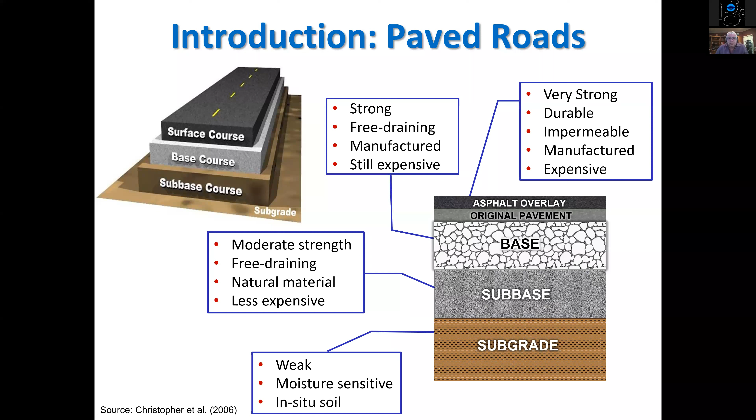All right, so how are geosynthetics going to help in these roadway applications? And on that, I have some great news for you, very, very good news. There is a huge number of geosynthetics with a wide range of properties that can be used in numerous roadway applications. This is to fulfill many different functions through a wide range, a wide variety of mechanisms.

This is great. We have the opportunity to improve performance. We have the opportunity to reduce costs. This is a very competitive market which fosters innovation. This is wonderful, and there are opportunities to optimize solutions, not only to address cost and performance, but also aspects such as sustainability that are becoming increasingly relevant for designers.

Yes, this is also a good news, a blessing and a curse. The not-so-good aspect is that we really need to recognize the differences, and this may be a daunting mission. We have many geosynthetics, many properties, many applications, many functions and many mechanisms, and this may lead to confusion.

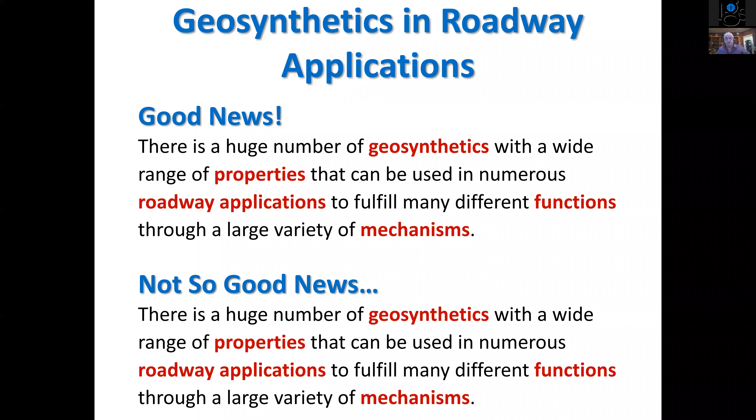In some cases I'm going to get into some advances. Ultimately what we want are the properties, and I'm going to get into some advances in the properties for use of geosynthetics in roadway applications.

Very briefly, just to relate to you what are the main geosynthetics we're going to be talking about in these applications. This includes geotextiles and many types of geotextiles, geogrids and geocells. I'm strictly going to focus on geosynthetics used within the body, within the structural component of the roadway. So I'm going to leave aside things like geosynthetics that can do a great job in erosion control, in surface water management. I'm not going to get into those.

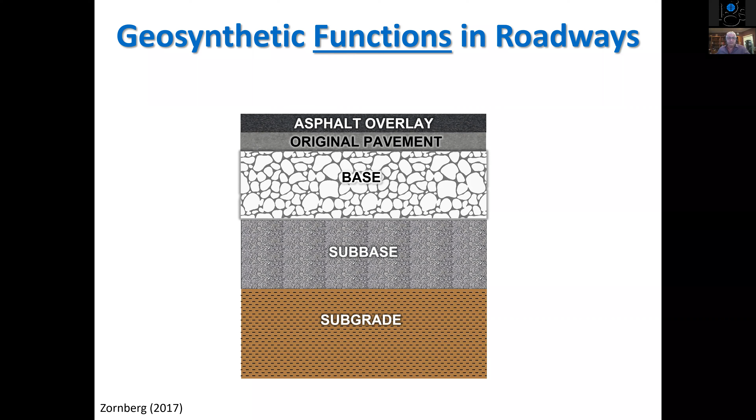So this is again the cross-section of our roadway. Where is geosynthetics going to help us, what functions? I'm just going to list them to you, not define them. So the different functions, and we're going to come back to these, some of them are mechanical: separation. We just want to keep dissimilar materials separate. And reinforcement, this is also a mechanical function.

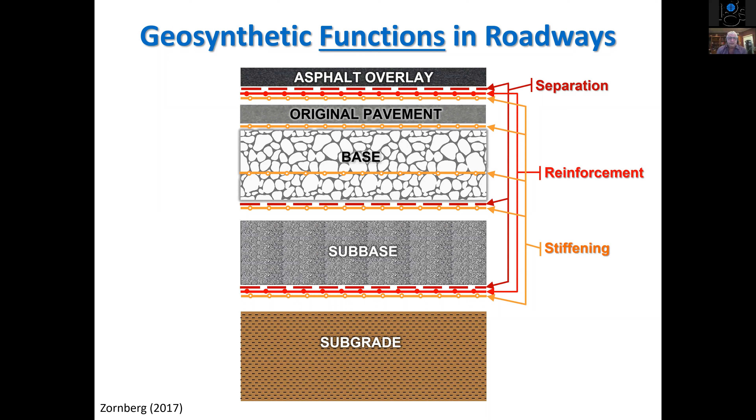Essentially we're dealing with comparatively large strains. We're developing tension in cases where we want to avoid some form of failure, of collapse. Then I'm going to call this stiffening. That is also a mechanical improvement, but here we're going to develop tension, though the focus, the objective, is going to be the control of deformations.

Then we have hydraulic functions, and this includes filtration. We want the water to get through, but the fines not to get through. We may have, as a strategy, barrier -- I'm going to touch on that in at least some cases -- when we want water to stay out, we want containment. And finally, we may have as a strategy the internal drainage within the roadway.

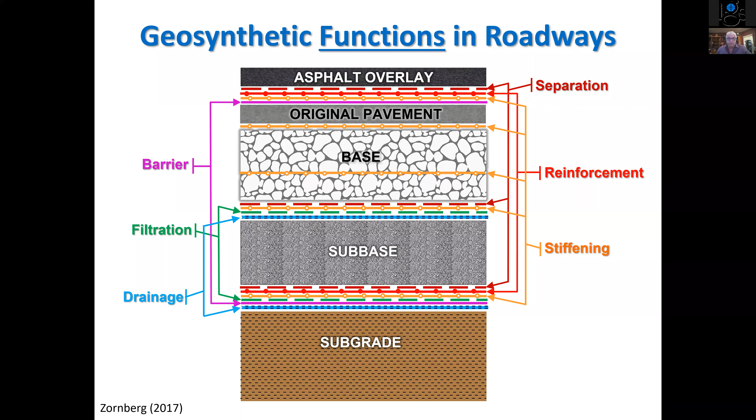All right, so we have talked about the different functions: separation, reinforcement, stiffening, filtration, barrier, drainage, protection -- protection I've just added here. How are we going to relate this to the applications? That's going to be the focus of this presentation.

I'm going to focus on 6 of these applications. The reason and the way we're going to come to each one is because the owner, the Department of Transportation, the private developer, has some design objectives -- I want to mitigate reflective cracks in my future overlay, for example. And the functions, we know why we want the functions: because they are the gateway to get the right specifications for the right properties.

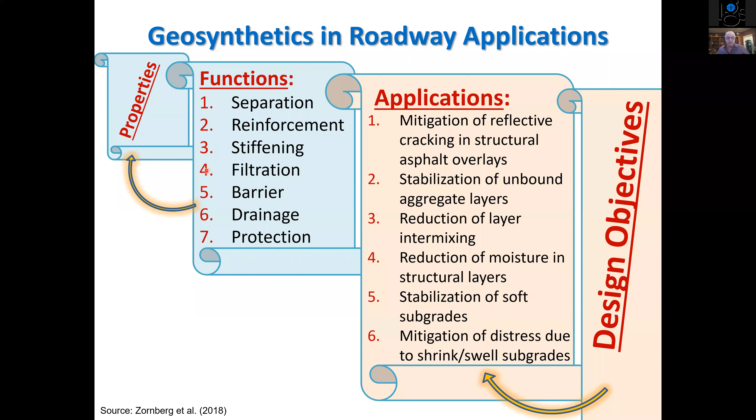But ultimately we want to go -- and I'm going to put my pointer here -- we want to go from the design objectives all the way to the properties, and there is a missing link. That missing link is the mechanisms, and we need that mechanism to link the application we're dealing with to the function we need to satisfy for that application.

So again, the focus is going to be on applications, and I'm going to walk you through 6 applications. Here I have them ordered 1 through 6, essentially from top to bottom. One, we're going to start with the mitigation of reflective cracking in structural asphalt overlays. Then we're going to get to the unbound aggregates, the base, the subbase, and we're going to talk about stabilization of unbound aggregate layers.

Then we're going to get to the interface with the subgrade, and we're going to talk about reduction of layer mixing, intermixing, and reduction of moisture into the structural layers. Then we're going to get to the subgrade, and specifically talk about stabilization of soft subgrades and mitigation of problems associated with the presence of shrink-swell subgrades, expansive clays, or frost-susceptible soils.

We could have organized this in a different way. For example, we could say that in some cases we're going to talk about mitigation of detrimental effects triggered not by traffic loads, but things that we have not designed, like reflective cracking in structural overlays or volumetric changes in the subgrade.

We could talk about stabilization of the base or the subgrade, where essentially we want to either enhance or prevent the degradation of the important properties that allow good performance against traffic loads, or we need to avoid or reduce problems that are time dependent, like layer intermixing and the presence of moisture.

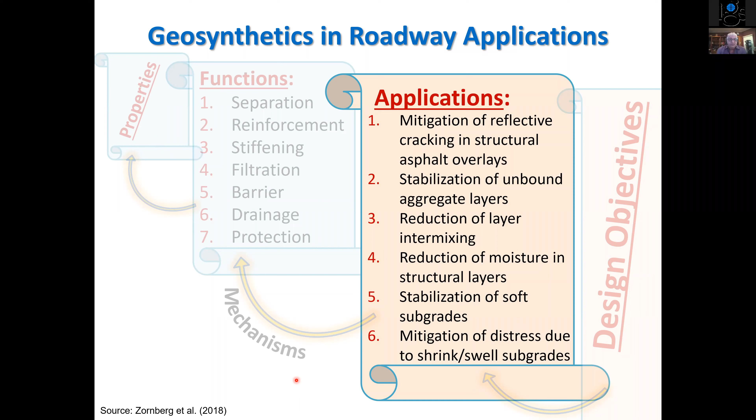To facilitate this, my good colleague and friend, Erol Tutumluer, and I have developed this table. Essentially what we're going to do in this presentation is I'm going to walk you through this table, and if you want, you can go ahead and download it.

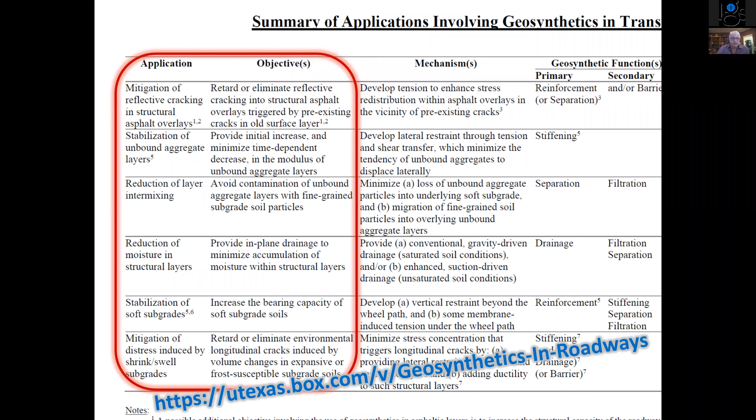So let's do it. We have 6 applications to cover. In case you want it, here I'm going to give you once again the URL, in case you want to download this table and sing along.

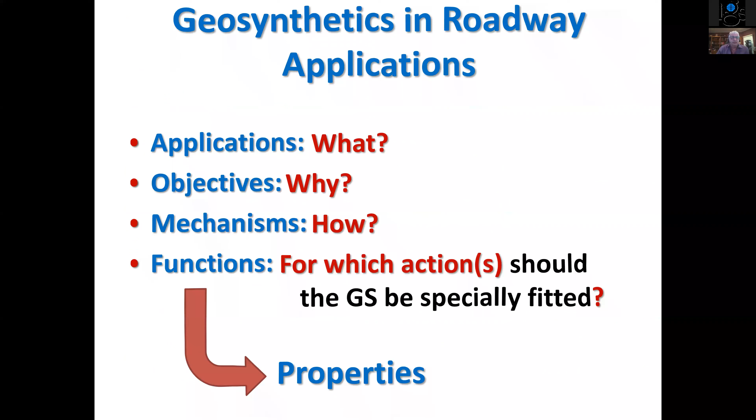Let's go to the first application. This is a very important one: mitigation of asphalt reflective cracking.

Essentially, the objective is to retard or eliminate reflective cracking into structural asphalt overlays that are triggered by the presence of existing cracks in the old surface. So here we have, for example, a paved surface in need of retrofitting. A typical large maintenance operation would be to place an asphaltic layer, perhaps 2, 3, 4 inches thick.

The problem is that we may have flexural and shear modes that very quickly may lead to the reflection of the pre-existing cracks into the brand new asphalt overlay.

Let me tell you upfront, this is a reasonably complex application, and indeed we have two quite different strategies to address this problem using geosynthetics. One, I'm going to identify as tension development. We're going to enhance the stress distribution within the asphalt overlay in the vicinity of the pre-existing cracks. If we're able to decrease the magnitude of the stress concentration, we're not going to trigger the crack, and that's the strategy in this particular application.

There's a different one: stress relief. In stress relief, we're going to allow crack propagation, but we're going to force, or educate, the crack to propagate in the right direction. Specifically, we're going to force the crack to develop along the interface between the new overlay and the pre-existing asphalt layer.

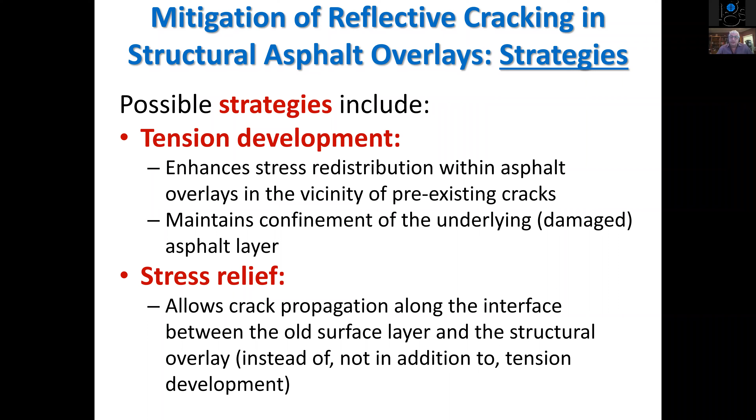The idea in this case is that the geosynthetic will allow the development of tension that will not necessarily avoid the crack from moving, but will distribute the strains in a way that we do not reach the threshold that leads to the triggering of the crack.

Rather than having reflection of the crack without the geosynthetic, once we have the geosynthetic acting as stress relief, essentially what we're forcing is a differential of lateral displacements within the pre-existing asphaltic layer and the new overlay. A crack will develop, but it will develop along the interface between the new overlay and the pre-existing asphaltic layer.

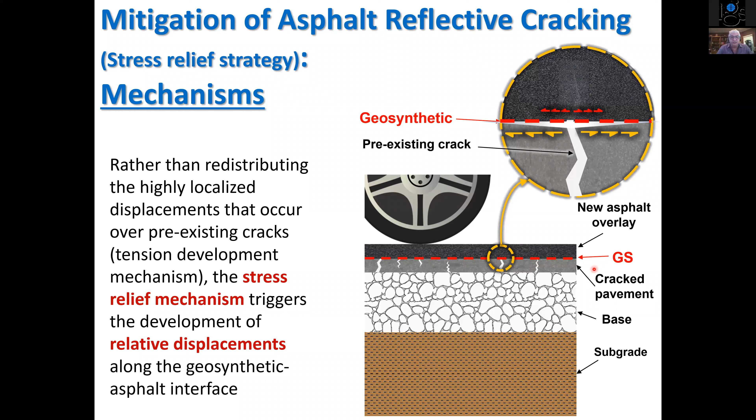So what are the geosynthetic functions? We have identified the mechanisms, and that is my main goal in this webinar. Once we have identified the mechanisms, what are the functions? If I want tension development, I need reinforcement - a geosynthetic that will develop tensile strength and stiffness. If I'm going for stress relief, some could call it a different function, but I'll call it a sub-function within the separation family.

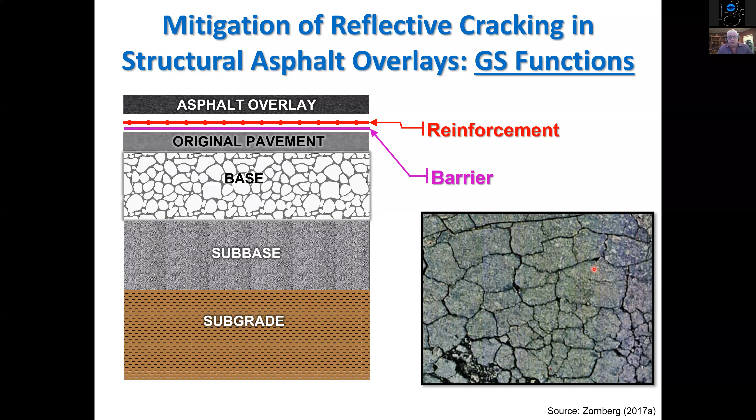Independent of which one it is, we may have a third objective that will improve the performance of the road: having a barrier to moisture infiltration. In case the cracks develop, the barrier will mitigate the continued infiltration into the additional layers. We can even have combinations, for example reinforcement and barrier, or stress relief and barrier.

I'm not going to dive into the details of the properties, but as you can imagine, once we have the functions, we can have a good sense of what the properties are going to be: tensile strength, unconfined tensile stiffness, asphalt retention, survivability related properties. That's a common one that we're going to see over and over.

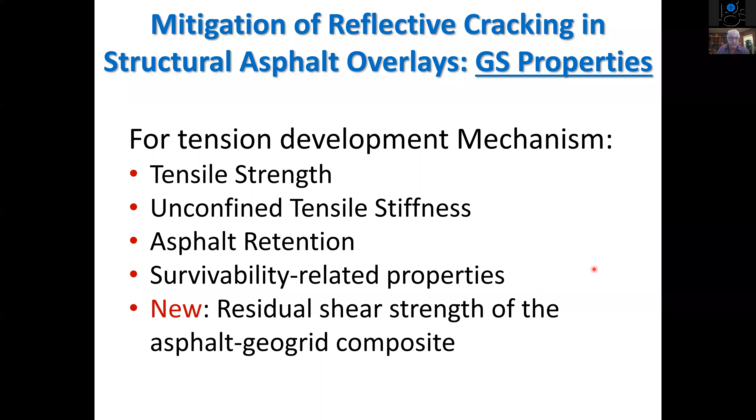I'm going to touch very briefly on something new. From time to time, in several of these applications, I'll cover at least one aspect that I consider a new direction or new property being considered in the industry. This is the post-peak, residual shear strength of the asphalt geogrid composite.

The benefit of this application is that we maintain the integrity of the structural asphalt overlay. If we maintain the integrity, we ultimately avoid the water intrusion that accelerates degradation of the asphaltic layer. There are many different types of geosynthetics used in these interlayers, known by different names: geotextiles, glass geogrids, polymeric geogrids, geocomposites, hybrid geomats, and peel and stick interlayers.

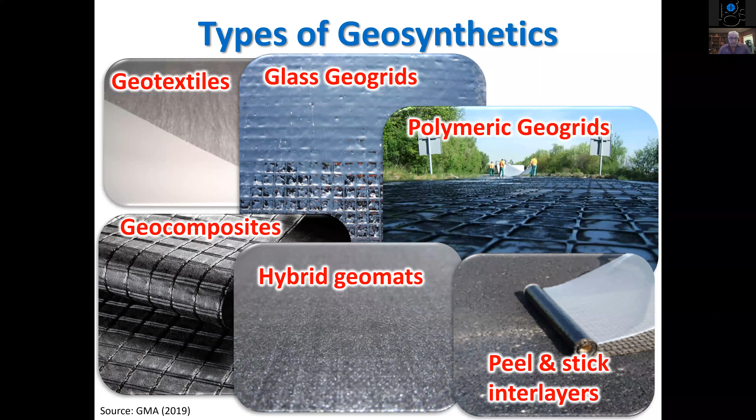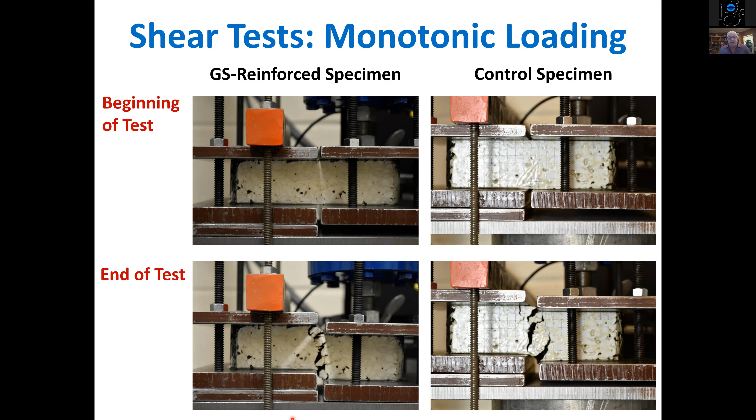In the case where we're interested in tension development, as illustration of how geosynthetics may work, this is monotonic loading, which is not the real loading, but you can see a significant difference in the load needed and in the mode of failure. This is a geosynthetic reinforced specimen, and this is a control specimen. What's interesting is that the control specimen, once it fails, it fails - there is no residual contribution.

But in the geosynthetic reinforced specimens, once we've reached the peak strength, the geosynthetic continues to help. So the energy continues to develop even after having reached peak - this is for polymeric geogrids. So there is a post-peak, post-failure, continued benefit of having the geosynthetic.

This is on cyclic loading. I'm not going to get into the details, but similarly, the results in specimens conducted under cyclic loading in shear are also consistent with the monotonic ones - different results, but similar, consistent trends. Here, for example, in the control specimen there's a very clear, well-defined failure. Here it is failure too, but over a much more distributed area.

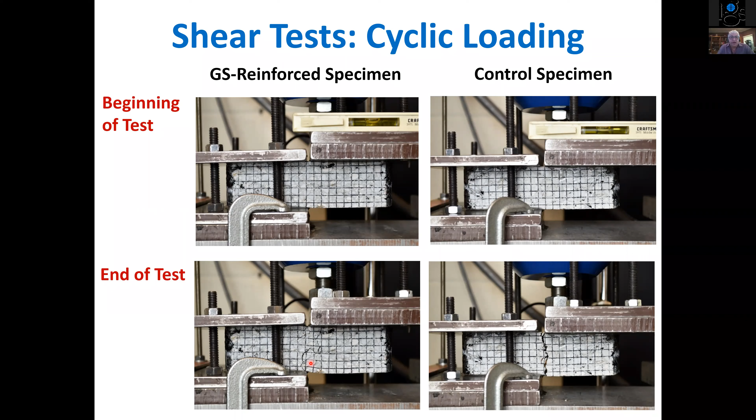I'm showing you the results of cyclic loading under different amplitudes - the green is the geosynthetic reinforcement load versus number of cycles, and the black is the control. This is just to show that the improvement the geosynthetic can provide in the asphaltic layer is significant. It can lead to a significant increase in the design life of the structural overlay.

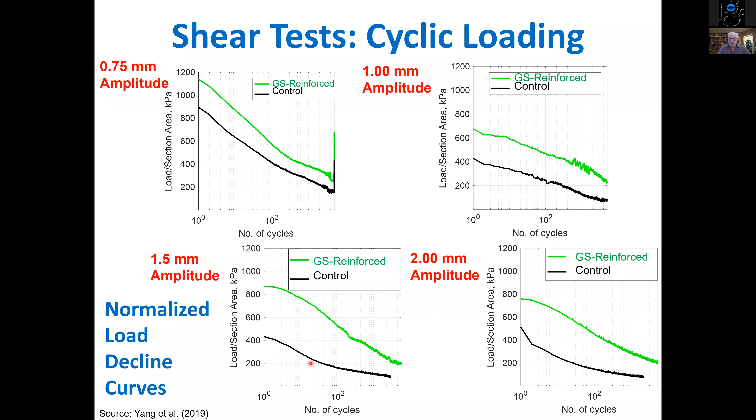Let's go to a next application. So we started from the top asphaltic layers. Let's go to stabilization of unbound aggregate layers.

The objective in this case has to do with stiffening the base or subbase, the unbound aggregate. This is done by providing an initial increase in modulus. The roads, after compaction, the base is born very stiff and very good. The problem is what happens with time. So avoiding the time-dependent degradation of the modulus is a key additional benefit of this stabilization application.

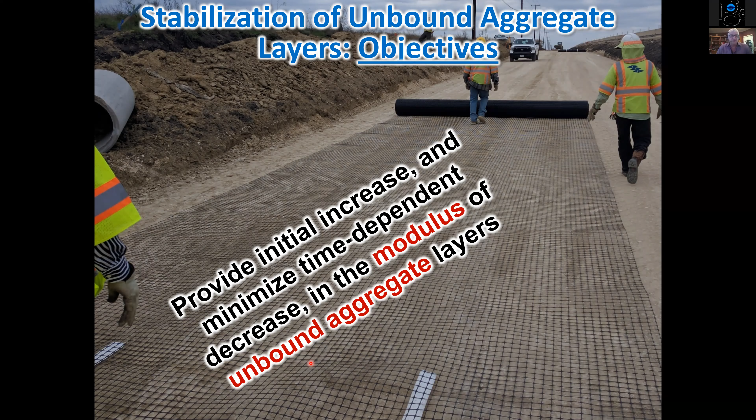So the mechanisms by which this is going to occur are essentially one. There has been a lot of discussion in the literature on what is the real mechanism. We know that it works, we didn't know for a long time why it works, and we have proposed a number of mechanisms. I think there is consensus that the most relevant mechanism is one: developing lateral restraint through tension and shear transfer to minimize the tendency of the unbound aggregate to displace. Let me show you this with a cartoon.

So here we have a non-stabilized road base, subjected to the cyclic loading of the wheels. What will happen with time is that there will be a tendency for the aggregate to displace. An aggregate is a wonderful material, but only if confined. If we have a clean aggregate not under confinement, this is a lousy material.

So what may happen is that because of a lateral displacement - and the displacements are exaggerated here, but this is the idea - we create a domino effect. Tiny lateral displacements may lead to decreasing the confinement of the aggregate. If we decrease the confinement, we lose the stiffness, the modulus in the aggregate. If we lose the modulus, we lead to a concentrated stress distribution that eventually leads to early failure by rutting. This is a serviceability failure, very different from collapse, and very difficult to quantify and design for.

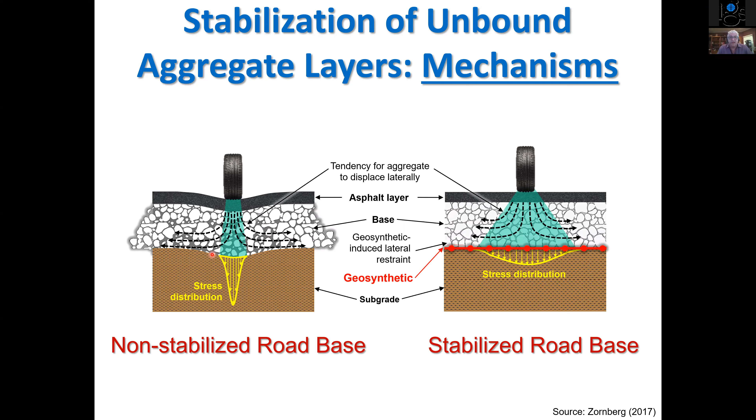What is the function that we need? The function that we need is one, and this is important, only one: the function of stiffening. We need to develop tensile forces, but the tensile forces we need to develop are at comparatively low strains. Consequently, it is the stiffness and not the tensile strength, the property that will govern the design and performance of stabilized unbound aggregate layers.

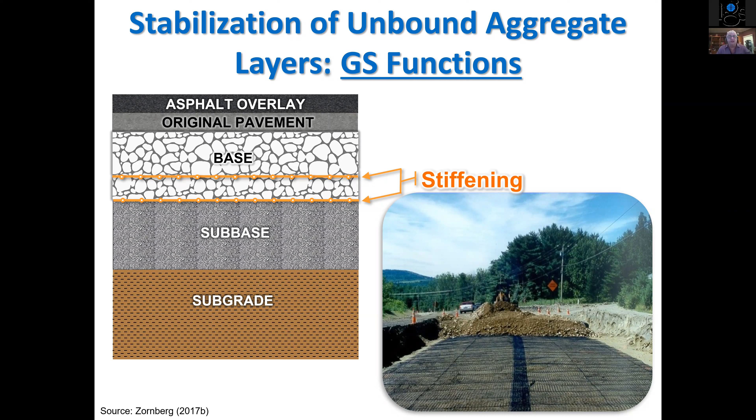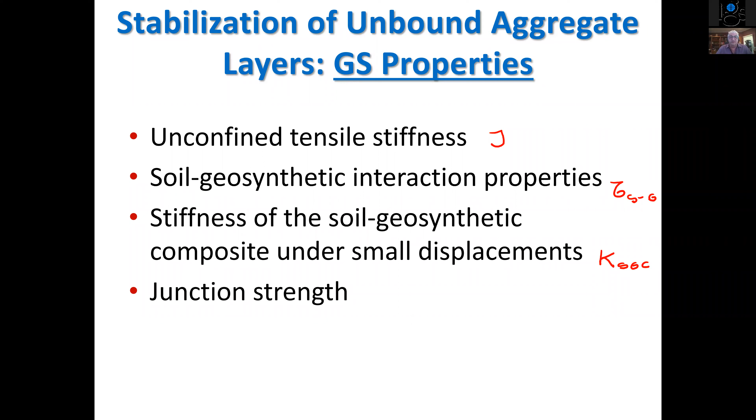What are the properties? I'm not going to get into the details, but let me list some of the properties that have been used. Unconfined tensile stiffness - we need developing stiffness, and we need transfer of the load between the soil and the geosynthetic. Let's call it tau soil-geosynthetic. I'm going to tell you a little bit more about some combined properties that combine into a single property both the stiffness and the load transfer mechanisms. Junction strength has also been specified and adopted in the case of geogrids.

The benefits are that we provide an increased modulus at the time of construction, an initial increase in modulus, but also equally important is minimizing or eliminating as much as possible the time-dependent degradation of the modulus in the unbound layers.

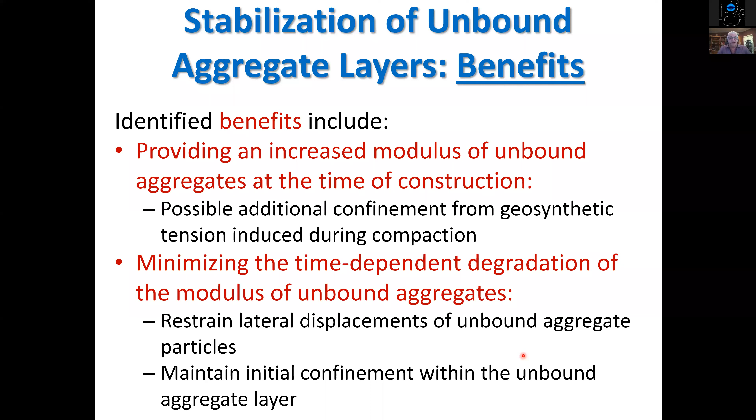What are the approaches for design? I'm not going to get into the details, but they exist. They are established in AASHTO, through procedures that require additional data to fit the benefits we get when using geosynthetics to stabilize a base, for example into the framework of AASHTO 93. The objectives have been: for a given design life, let's reduce the thickness of the base, or for a given base thickness, let's extend the design life. These have been the traditional design objectives.

The approaches are TBR, BCR. They essentially quantify the improvement, in the number of cycles in the design life for example, that the presence of the geosynthetic will add to a given cross-section of a roadway. I'm going to touch very quickly on the quantification of a new property, the stiffness of the soil-geosynthetic composite.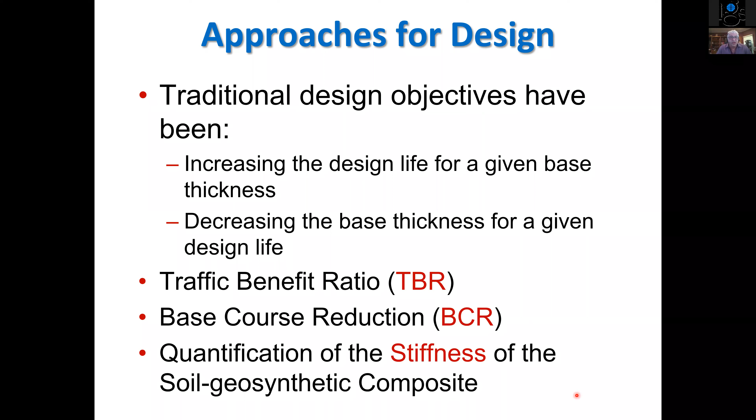This new property, I didn't tell you, I just threw at you that the mechanism is lateral restraint. This comes after long discussions and research over the years, in which two other mechanisms, membrane tension support and bearing capacity increase, have been identified as potentially existing. But the level of displacements, the level of shear strain needed to mobilize those mechanisms leave us with one remaining mechanism, which is the lateral restraint, minimizing or eliminating the tendency of the aggregates to displace permanently, monotonically, due to the wheel loads.

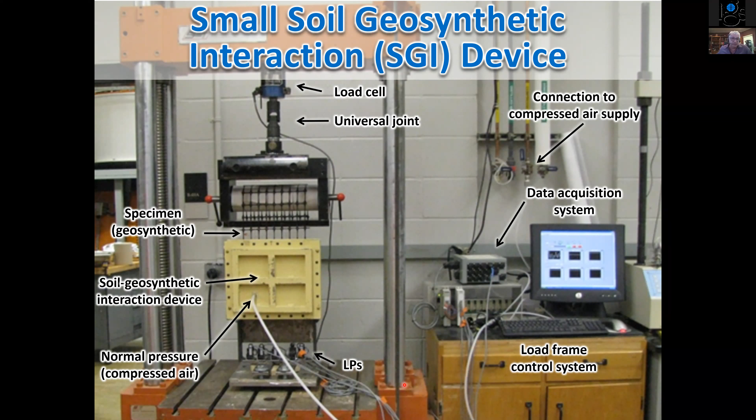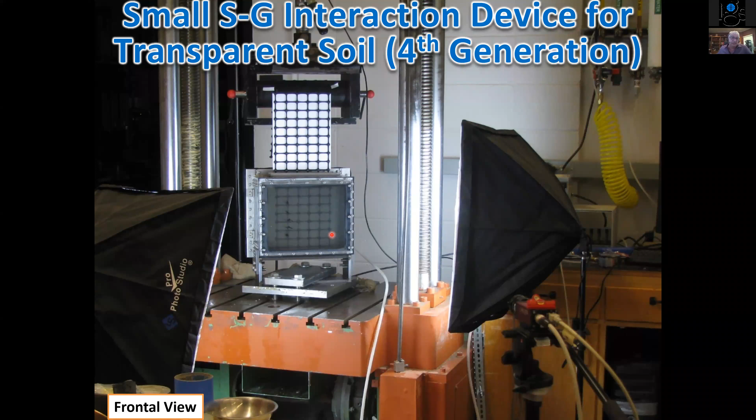Let me show you something. We have done this test not only in this yellow box, but also in this transparent box. The transparent box allows us to see the development, straining, and twisting of the ribs, in this case of a geogrid. But the trick here is that we need a transparent soil in order to observe this. This is the front view, and we can even see the lateral view. In this case, the geosynthetic is vertical, and we could see the development of the shear bands that ultimately form this stiffened zone that we're after.

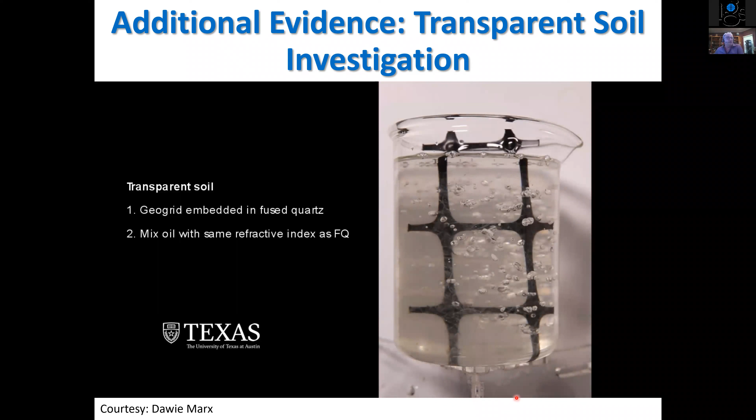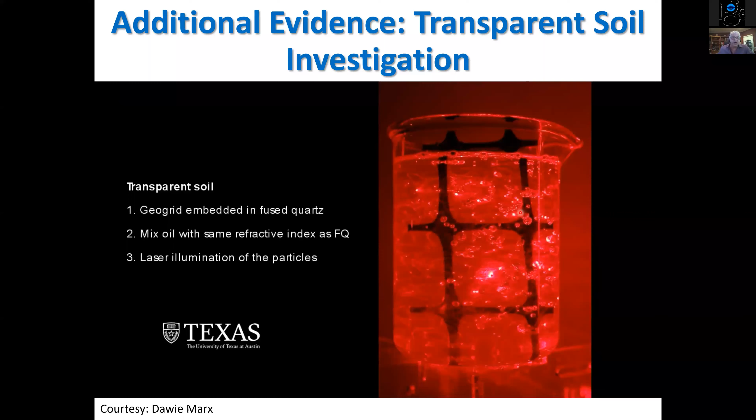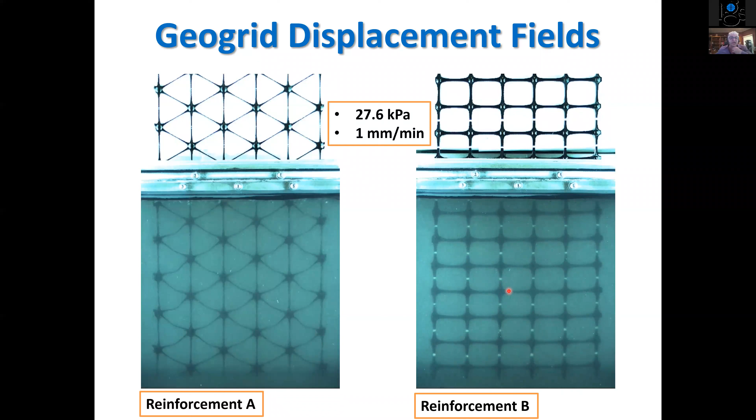Just to tease you on this, the result of this stiffness of the soil geosynthetic composite comes after additional evaluation using transparent soil. And what is this transparent soil? It's fused quartz, very pure quartz. So it's a granular material, but it turns out that if submerged into a liquid with the same refractive index as the pure quartz, it becomes transparent. Even more, it gives us the ability to observe particles in a given plane if we use laser technology. Independent of that, essentially what we can observe is the same soil geosynthetic interaction testing, but now we can observe the development of the strains and the load contribution of the different ribs as the test progresses. This test has been implemented recently by TxDOT, and I'll be happy to share the information with those of you who may be interested.

So we have covered now 2 of the 6 applications. Let me go to the third one, reduction of layer intermixing.

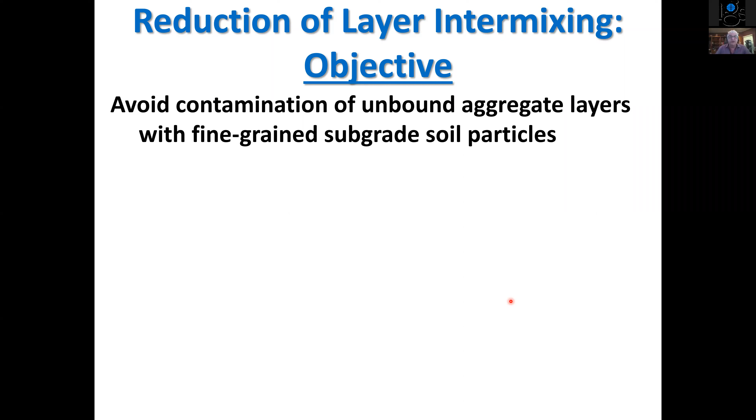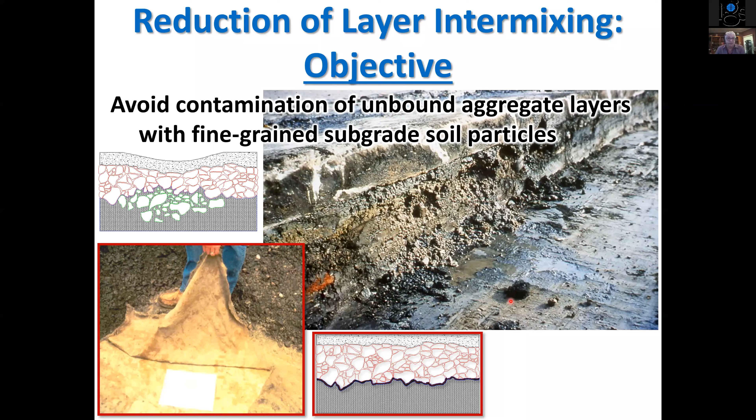There are two mechanisms that we want to avoid and minimize. Without the geosynthetic, we would have the loss of unbound aggregate particles into the subgrade, which is some sort of a local bearing capacity failure. But we would also have upward pumping of the fine-grained soils in the subgrade into the aggregate. This is a cartoon to illustrate that. Here we have a road without a geosynthetic separator with a soft soil, a high degree of saturation. With wheel loading, we will have the upward pumping of fines into the voids of the aggregate, and we would lose the particles of the base. Effectively, clay plus aggregate is clay.

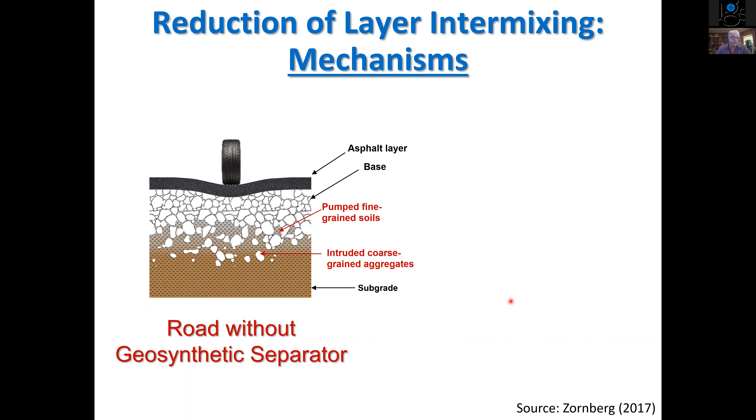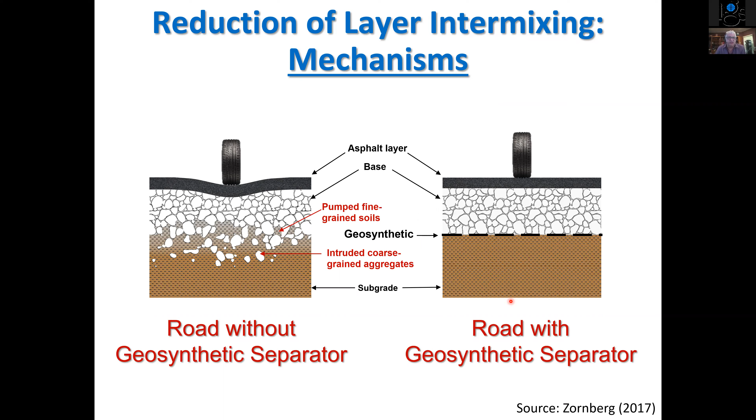So a contaminated aggregate will behave much more like the subgrade material than the original aggregate material. The solution to this is very simple and very inexpensive: placing a geosynthetic separator in between, in this case, the base and the subgrade. So what are the functions? Clearly separation, and because we're often dealing with the presence of water, filtration.

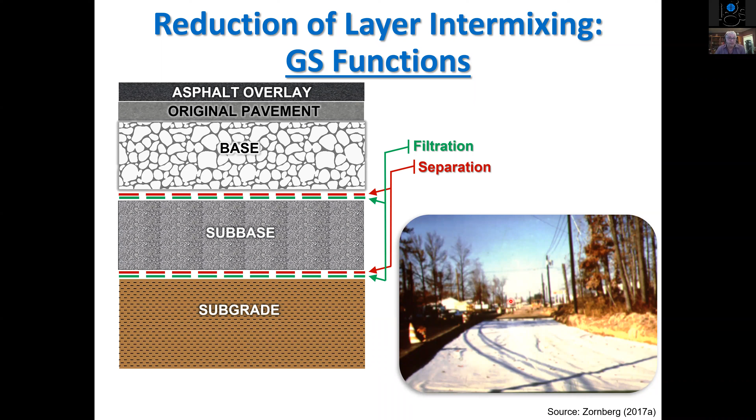So what are the properties? Now that we have identified the functions, we can get the properties. Essentially, the main thing we need to ask the geosynthetic is to just exist, just be there. So if the geosynthetic survives a series of index and mechanical properties quantified in the specification AASHTO M288, then it will do its job of being a separator. We also need additional hydraulic and filtration properties, quantifying the permittivity, which has to do with hydraulic conductivity through the geotextile in the normal direction, and some measures of the pore size distribution, which we identify as the apparent opening size.

Again, I'm not diving into the properties, just telling you that once we have properly identified the function, we can do the next step, which is coming up with the right properties.

Benefits: we will continue to use the as-designed thickness of our base. That's a very expensive component of the roadway, and we design the thickness. If we decrease the thickness over time, that's a big problem, and we will maintain it just by having a separator. Otherwise, contamination will lead to a reduction in the quality of the unbound aggregate materials. So we have gone through asphaltic layer, base, and reducing the intermixing.

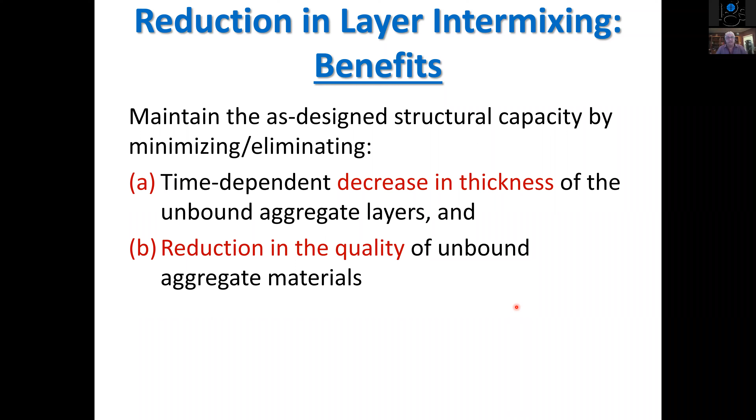Something else that may happen, particularly at the interface with the subgrade, is another important application and problem for which we have a solution: the reduction of moisture in the structural layers. Here we have a view of a roadway and the many different potential sources of moisture. Moisture in the structural layers is not good for the high modulus that we need that structural package to deliver. So the objective is to provide in-plane drainage to minimize the accumulation of moisture within those structural layers.

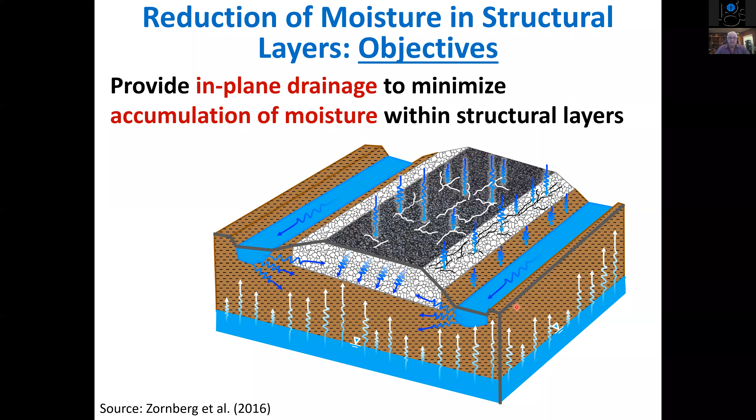What are the mechanisms by which geosynthetics can help us? We can identify at least two mechanisms. One, I'm going to call conventional or gravity-driven lateral drainage. This is, essentially, we're going to develop drainage, but these drains—and this may be counterintuitive—only drain free water. So once we have saturation, free water, our conventional gravity-driven drainage will take place. This will not allow the decrease of moisture that is stored, for example, within a high moisture content but not necessarily saturated subgrade.

Then we have the enhanced or suction-driven lateral drainage. This is in-plane flow that occurs under unsaturated conditions. Non-woven geotextiles and woven geotextiles will do the job, for example, in gravity-driven lateral drainage. In this case, we need something else.

We will need special yarns, and we're going to call this—or it has been called—Wicking Geotextiles. In this case, the difference is that this will allow not only the drainage of free water, but also stealing moisture from the high moisture that may be accumulated and stored under unsaturated conditions in the base or in the subgrade.

So the idea is that, again, here we have a cross section with multiple sources of water, sometimes coming from the top down, sometimes coming from the bottom up, capillarity. And the moisture leads to a decrease in the modulus, and this leads to failure by rutting of our roadway. The idea is that by having in-plane drainage, we will have the ability to maintain the modulus both of the structural layers and of the subgrade.

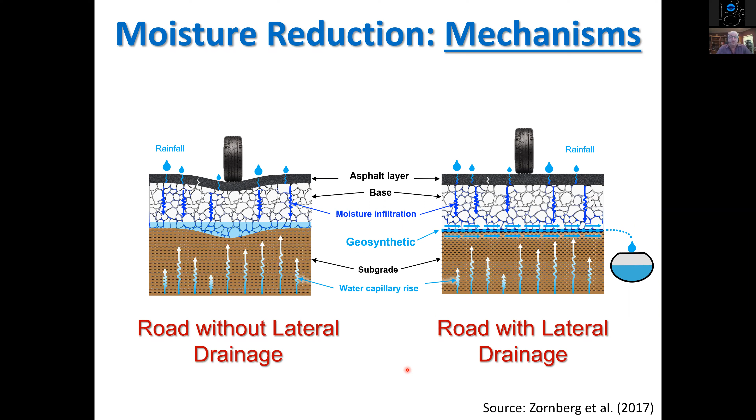So what are the functions? We have identified the mechanisms. Now we need the functions, and the functions are going to be separation. We need to still maintain the separation that we talked about in the previous application, but in this case, we also need filtration. The water will need to reach the drain, and lateral drainage.

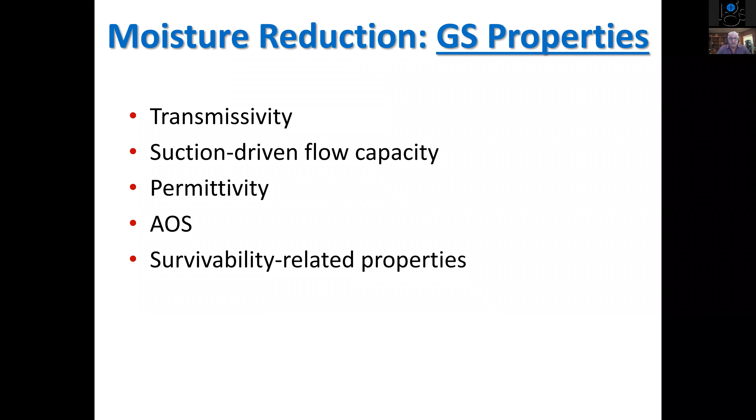The properties will depend on what type of mechanism we're tapping into for lateral drainage. This will include transmissivity, a measure of the in-plane hydraulic conductivity of the geosynthetic, or suction-driven flow capacity in the case of Wicking Geotextiles. Permittivity, apparent opening size, and survivability-related properties will also be relevant.

So the benefit is that we're going to avoid or minimize two things. One, if we have a high degree of saturation in the subgrade, we may have even generation of positive pore water pressures that may lead to early failure. In addition to that, we will also avoid or minimize the decrease in the modulus of the structural components of the road. So these are two important benefits.

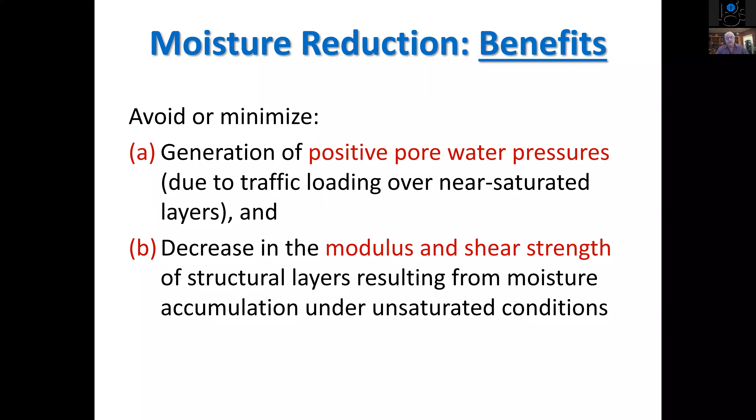One way of quantifying how important this is: if you're familiar with AASHTO 93, there is a factor that affects the structural capacity, the structural number, and affects the structural layer coefficient. This factor essentially penalizes the modulus, the structural number, depending on the percentage of time that we anticipate that our roadway will remain saturated.

And this will depend on that percentage of time—how often we have a high degree of saturation, and also the quality of the drainage. This can be a penalty of as much as 40% of the original modulus if we have poor drainage conditions, or even a benefit, an increased modulus, if we can guarantee that we will remain under low degrees of saturation.

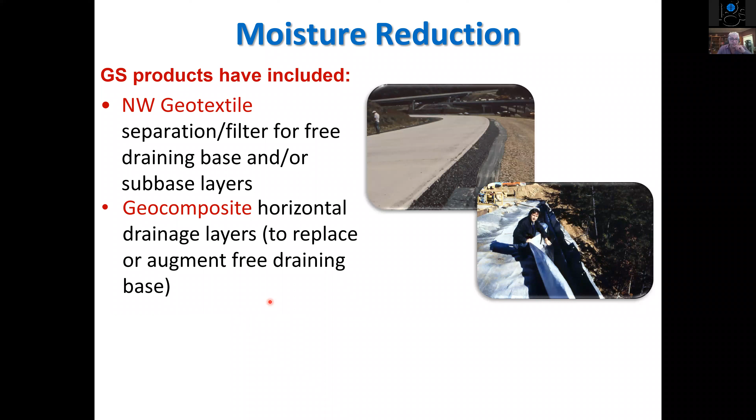This is an example of the use of non-woven geotextiles that provide separation, filter, and in-plane drainage of free water. This is even a geocomposite, and you may recognize a young Barry Christopher in that picture using a geocomposite with horizontal drainage layers. And the newcomer, which is enhanced lateral drainage using wicking geotextiles.

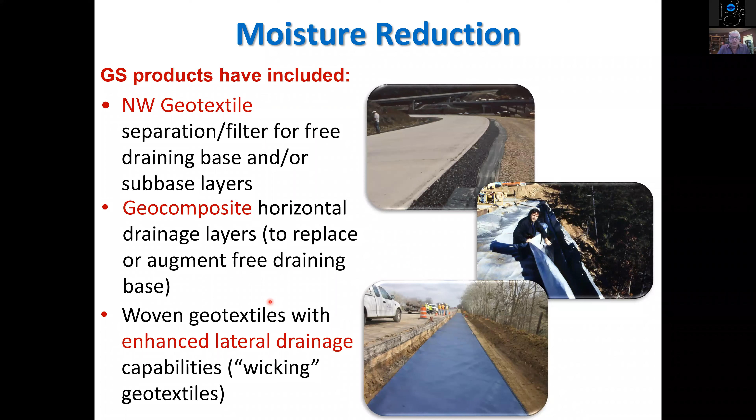Okay, let's now go to subgrade stabilization. What is the objective? This is also stabilization, but what we want to tackle is the subgrade. What we want is to increase the bearing capacity of soft subgrade soils.

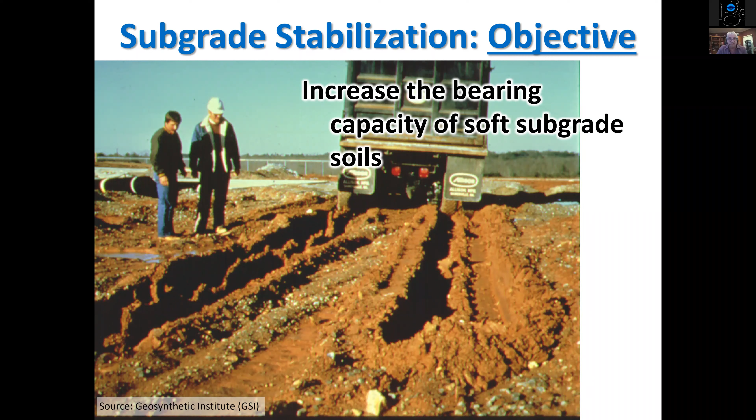There are two key mechanisms that have been identified, both having to do with increased bearing capacity in the subgrade soils. One, and probably the most relevant, is the vertical restraint of the subgrade, which I'll come back to with a cartoon. The other is a membrane effect, essentially a load that develops once the geosynthetic deforms enough to have an out-of-plane component of the load. Let me show you these two mechanisms in a cartoon.

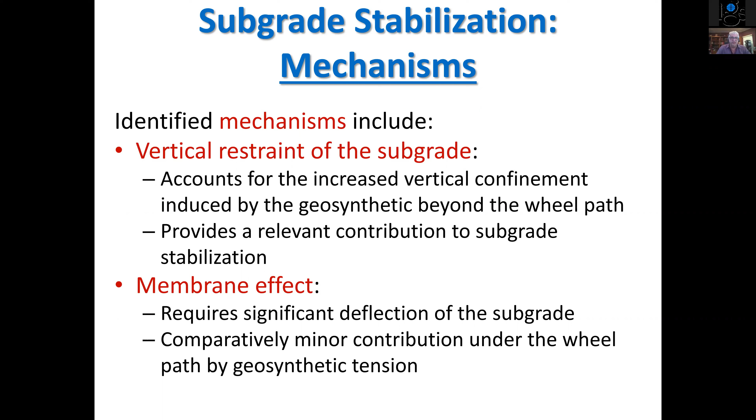So here we have a road with a non-stabilized subgrade, and let's say that this is a very soft subgrade. What we want to avoid is this potential failure surface, which we call a punching shear failure surface. We want to avoid mobilizing high shear into the subgrade to the point that we change the mode of failure into a punching type shear. This is essentially what we're trying to avoid by using geosynthetics to stabilize the subgrade.

This instead is the impact that the presence of a geosynthetic, placed at the interface between the soft subgrade and the base, may have. How does this work? Well, this geosynthetic will develop tension, but notice that there is an out-of-plane component in this geosynthetic. The tension is developed along the plane of the geosynthetic, but in the central portion we may consider an out-of-plane component that will decrease the magnitude of the load applied from the wheel directly to the subgrade.

That's one benefit. But the most important benefit is that this geosynthetic, you can think of it as hanging on, not within, the wheel path. We have the mechanism we identify as membrane effect, but beyond the wheel path we have another mechanism, the subgrade restraint. We're pushing the subgrade laterally downwards, restraining that subgrade. If you remember the bearing capacity equation, this affects the Q component of our Terzaghi bearing capacity equation. It's good to have surcharge right next to the main load that we're evaluating against bearing capacity failure.

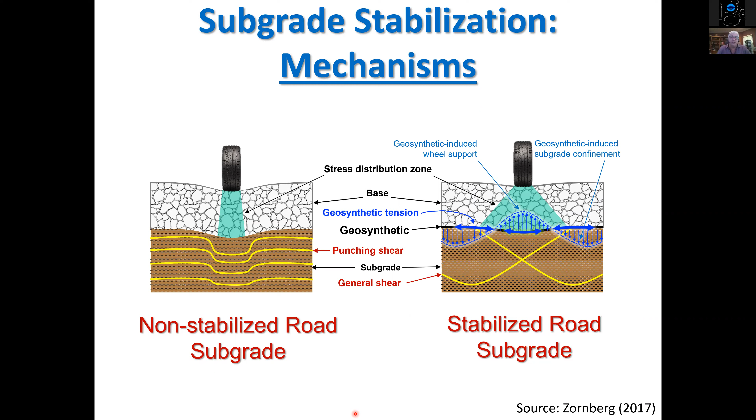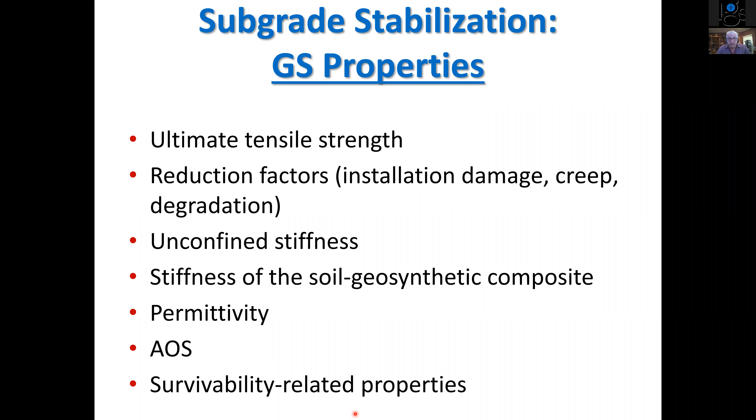All right, what are the functions? The functions are reinforcement and stiffening. We need tensile strength, we need stiffness, and since we're typically dealing with water, we will also need filtration. I'm going to accelerate a little here. Here are the list of properties. We have identified the mechanisms, we can define the functions, we can define the properties. And the benefits, essentially, are that we minimize time-dependent rutting by minimizing the vertical and shear stresses in the subgrade, and by redistributing the loads in contact with the subgrade.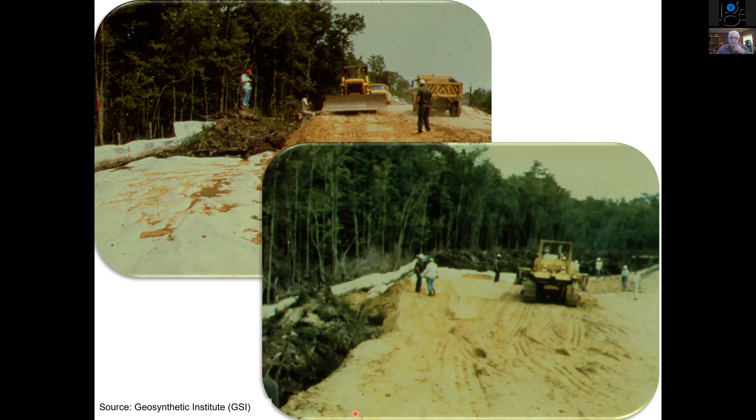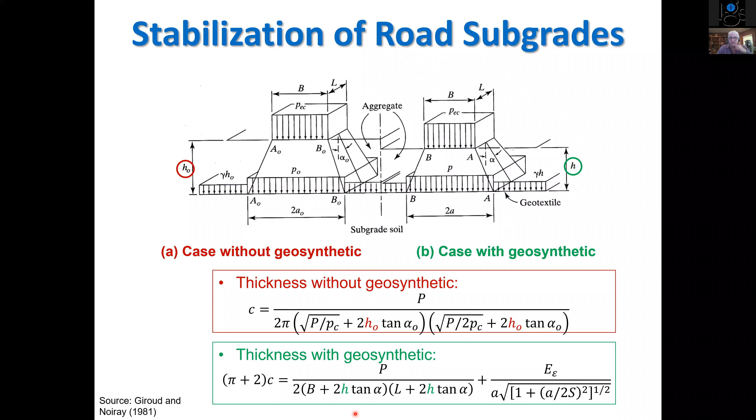This is an original one that I'm showing for simplicity: the Giroud and Noiray, in which we have a certain thickness, shown here in red, of the loading platform without geosynthetics, and that thickness gets reduced if we have geosynthetics. This methodology has been improved, and the state of the practice is the methodology by Giroud and Han, which builds on this original one. And the last one is the mitigation of distress induced by shrink-swell subgrades.

This is a road near my home here in Austin, Texas. This is Turnersville Road in Buda, south of Austin.

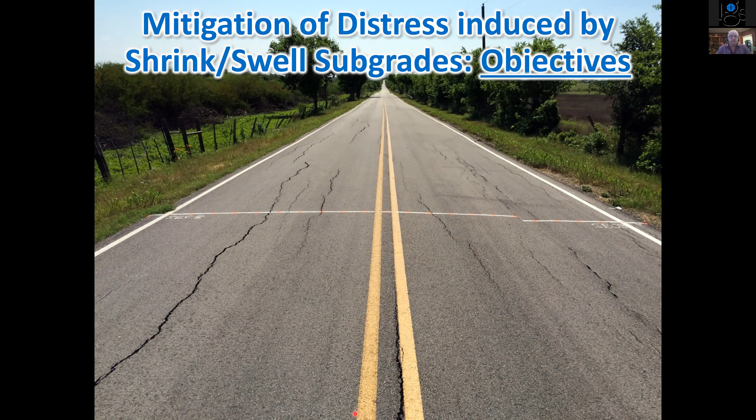Here we have these longitudinal cracks. These longitudinal cracks are not due to traffic loads. These are due to what we sometimes call environmental loads, due to volumetric changes of the subgrade. So the objective of using geosynthetics in this type of project is to retard, or ideally eliminate, the environmental longitudinal cracks induced by either expansive clays or, equally important, frost-susceptible subgrade soils.

The strategies are many. One is to maintain the integrity of the unbound aggregate layer to minimize or impede the triggering of longitudinal cracks. Other strategies include controlling the moisture distribution and the fluctuations of moisture that occur within the subgrade, maintaining the integrity of the asphaltic layer by reinforcing it, or ultimately avoiding moisture fluctuations at large using a barrier.

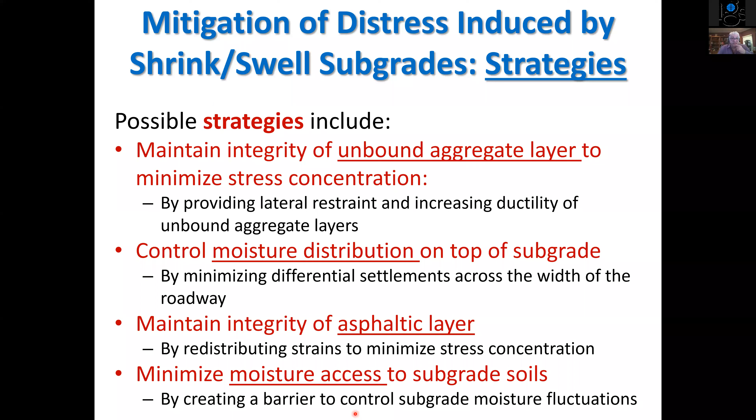I'm going to talk mainly about the first approach, the first strategy, which has proven to be very successful in Texas. This strategy, by maintaining the integrity of the unbound aggregates, essentially minimizes the concentration of stresses that triggers those longitudinal cracks, ultimately by providing lateral restraint, which we already talked about when discussing stabilization of the unbound aggregates. But in that case, the goal was to maintain or increase the modulus of the unbound aggregates.

And also, very importantly, we're going to add ductility. By the presence of the geosynthetic, we add ductility to the unbound aggregate, which will now tolerate these movements. We're not necessarily fighting the development of these movements; we're fighting the problems associated with these movements.

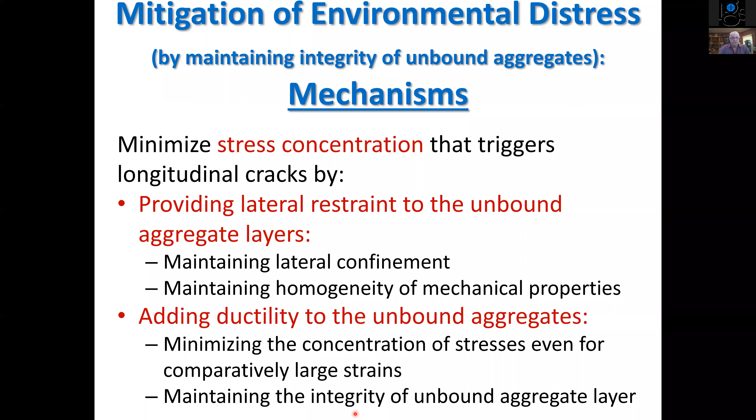Let me show you a cartoon. So here we have a road without a geosynthetic on expansive clays. During the wet season, it turns out that the shoulders will wet up much more and rapidly in comparison to the center line of the road.

Then comes the dry season, and in this case the drying front will advance also from the shoulders. But the changes will occur close to the shoulders and not necessarily close to the center line. This is what causes a flexion problem. So we have heave during the wet seasons—we have measured this—and settlements during the dry seasons. At the end of the dry season is when we have the development of the longitudinal cracks.

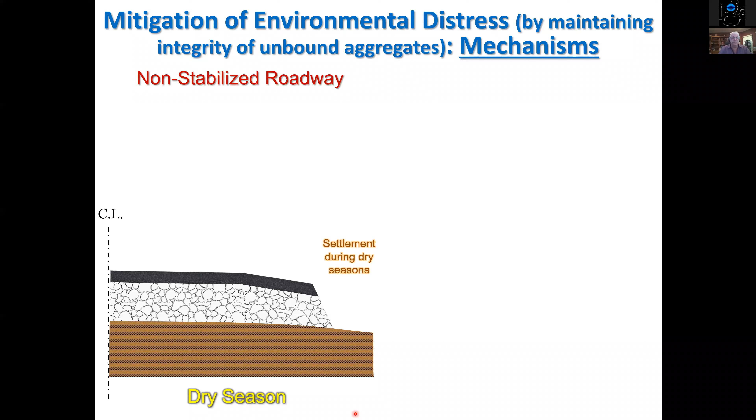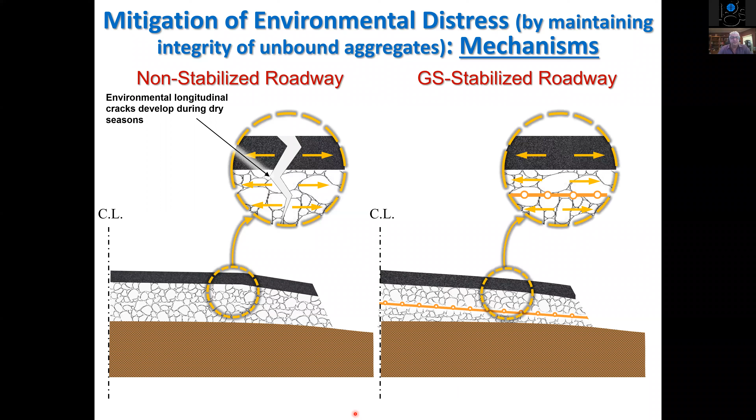It's a flexion problem. How do we address this? By using the strategy of maintaining the integrity of the unbound aggregates. This is done essentially by adding ductility and distributing the strains within the unbound aggregate. This is essentially what we are doing.

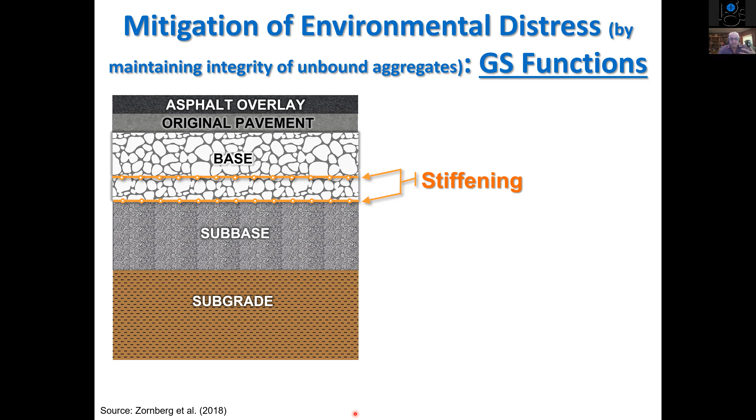What are the functions? Because we're using this strategy, the function that we will need is stiffening. In this case, we will need to maintain the stiffness and the ductility of the base. These are the properties consistent with the ones discussed when talking about unbound aggregate stabilization. The benefits are that we maintain the integrity of the asphaltic layer, eliminate those longitudinal cracks, and consequently eliminate the water intrusion as well.

I'm going to go very quickly through an example in Texas. Texas is in bad shape, but the entire central US is in bad shape with the presence of expansive clays. Blue in this USGS map, and red is highly expansive. You're familiar with Texas—4 of the 5 biggest cities in Texas are along this corridor of highly expansive clays: Fort Worth, Dallas, Austin, San Antonio.

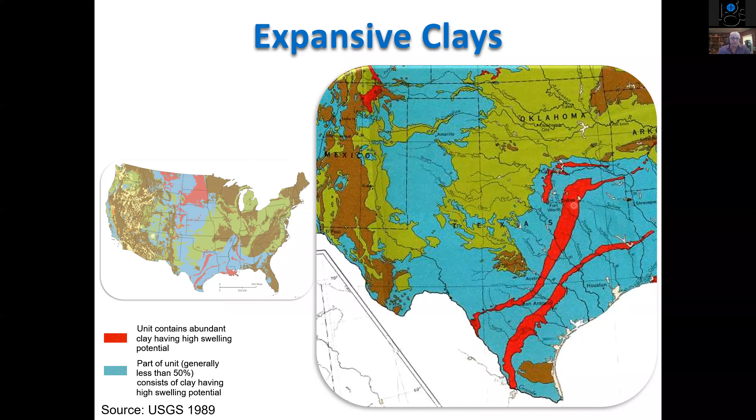Seeing is believing. I'm not going to get into the details, but what you see here is two lanes, one with longitudinal cracks and one without—one stabilized with geosynthetics, the other not. This is good evidence that this works, which has been quantified.

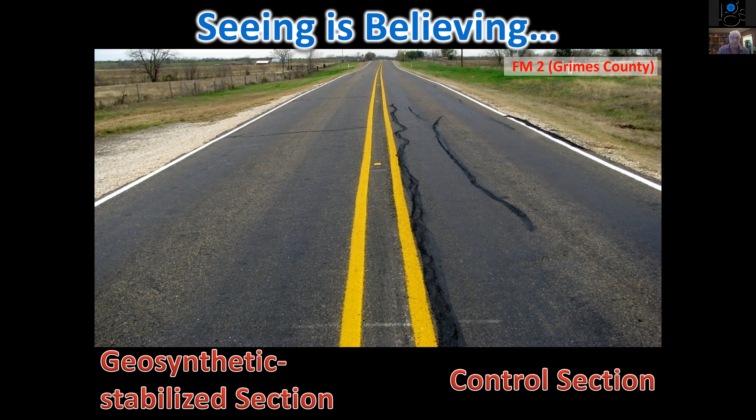In this case, what you see is the measurement on the vertical axis of performance, the percentage of longitudinal cracks versus time, during a particularly dry season. We see the increase in longitudinal cracks in not one, not two, but three different geosynthetics, and this is the case compared to the control section without geosynthetics. It's unambiguous that the use of geosynthetics protects and minimizes problems associated with the presence of expansive clays.

And even more, in this particular project there were also lime-stabilized sections. This dashed line shows the increased crack percentage on the vertical axis versus time on the horizontal axis—the increase in cracks over time for the lime-stabilized sections.

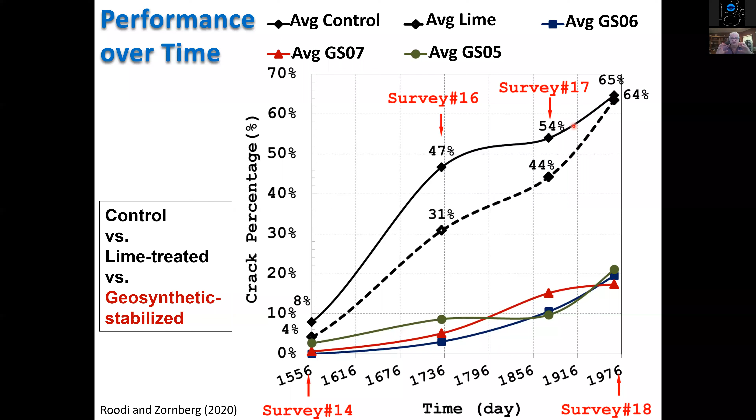The moral of this story is that lime may prevent the movement. That's the goal of lime stabilization, but either you prevent it completely, or if you have some movement, not only do you have movement, but you have a brittle surface that will trigger that crack.

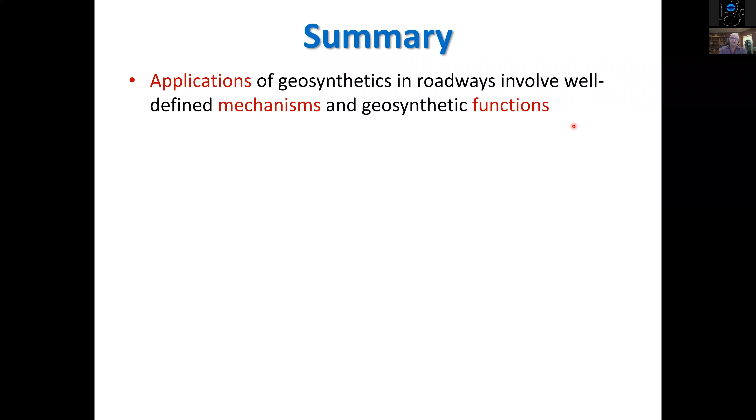Summary. I've rushed you through many applications on geosynthetics in roadways that involve well-defined mechanisms and geosynthetic functions. There are significant opportunities for improving roadway performance by using geosynthetics in applications such as, and this is only a partial list: mitigation of reflective cracking in structural asphalt overlays, stabilization of unbound aggregate layers, reduction of layer intermixing, reduction of moisture in structural layers, stabilization of soft subgrades, and mitigation of distress induced by shrink-swell subgrades.

Very important, and that's the main objective of putting all this together, stepping back and looking at all these applications at once: identification of the mechanisms is key to identify what geosynthetic functions we need. And the proper identification of the geosynthetic functions is in turn key to establish the properties that we need in the design and specification of the geosynthetics. And with that, I thank you so much for your attention.